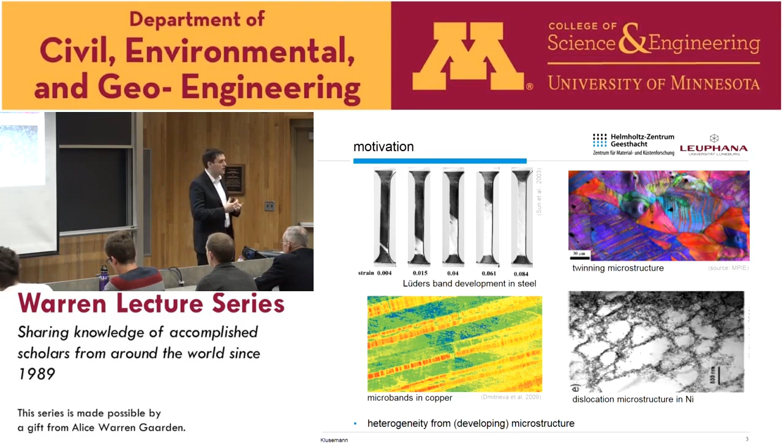And I think this example probably everybody knows: the dislocation microstructure in nickel. Rather than having a homogeneous distribution of dislocations, you see this very typical dislocation cell structure. So these kinds of mechanisms have to be accounted for somehow in your material model to predict the properties correctly.

In my new position, I'm dealing always with applications, so this has to be remembered in the background. Here are some examples of deep drawing, or forming in general, and this has to always be taken into account. It's not enough to just account for a very small part of your material—you want to apply this also to large process simulations in the end. So you need some technical tools for that.

So when we want to understand the material behavior, we always come to multiscale. We just were in the seminar before, also multiscale. This is, of course, a very urgent topic.

You can understand that if you just look here at this cup. You have a specimen at the beginning. You zoom in, and at the first level you find maybe a polycrystal, then a subgrain dislocation structure. You go even further down, you find maybe dislocations, then the single lattice defects, and at the lower scale, of course, your atoms.

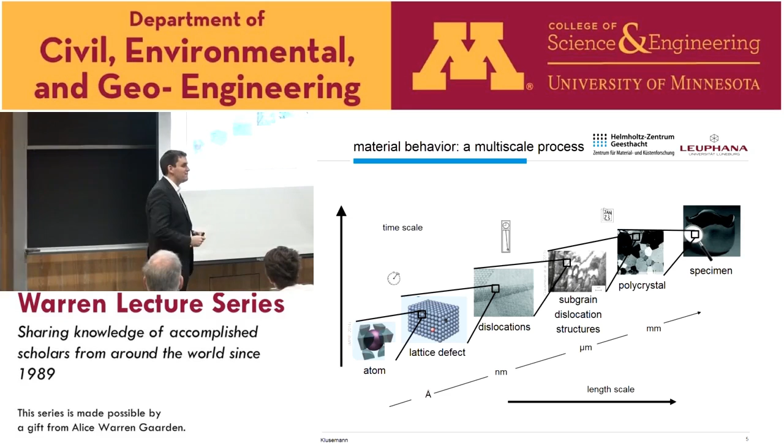So you have several length scales here, but not only length scales, you have, of course, also several time scales. And well, you could, of course, now say, okay, it might be optimal just to start with the atomic level.

You discretize everything with single atoms, and then you have your specimen properties correctly. Yeah, first of all, this is numerically not possible to handle. And additionally, it's also a question if you don't introduce a very, very small error at this level, which actually sums up at the higher scales.

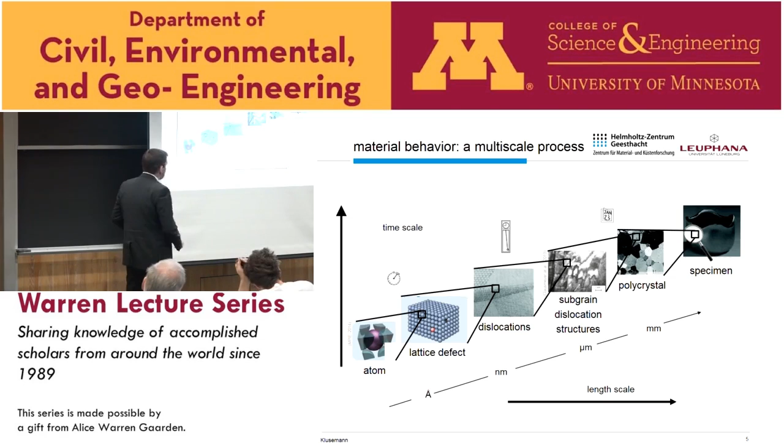So there's always a need for models which first of all couple this information, but also for models which start at higher levels and incorporate, in a kind of homogenized way, the properties from the lower scales. So which you can also validate then with experimental results, for example.

Okay, so the first topic I will talk about is related to size effects. And size effects, when you think about that, you classically think about a Hall-Petch effect. However, this is not what I'm talking about today.

So just imagine the following case. You have the classical miniaturization, which leads to even thinner and smaller metal components. But this doesn't mean that your grain size also has to be decreasing. Of course, if you're talking about nanocrystals, this is true. However, in general, this doesn't have to be the case. It just can be that your specimen size is decreasing. And if you have this case, then of course you have much less crystals present, and this leads to a dramatic change in your mechanical properties.

So what I will talk about is first order size effects. As I mentioned, first order size effects are first of all the microstructure size effect, so classically Hall-Petch, which simply means the smaller my grain size gets, the stronger my material. It's related to the dislocations.

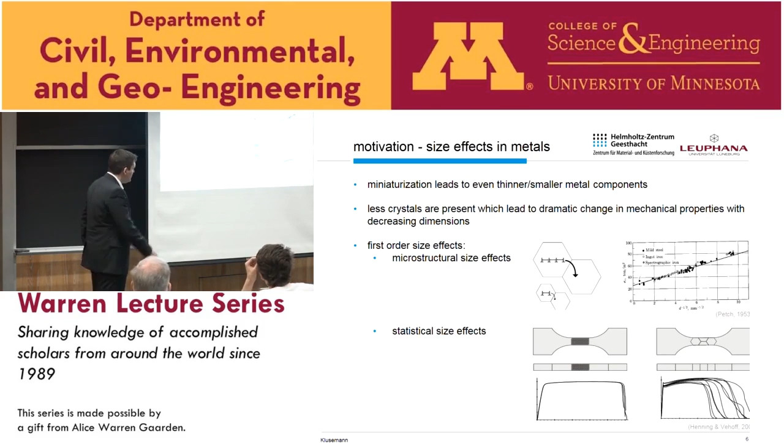What I'm talking about is the so-called statistical size effect, which is often forgotten, and that's just shown here. So you have your tensile specimen, and imagine the case you have a large number of grains here, and you have an isotropic orientation, isotropic texture, let's say. Then it actually doesn't matter what the single orientation of each of the grains is. You have always a kind of similar response if you do tensile tests on these kind of samples.

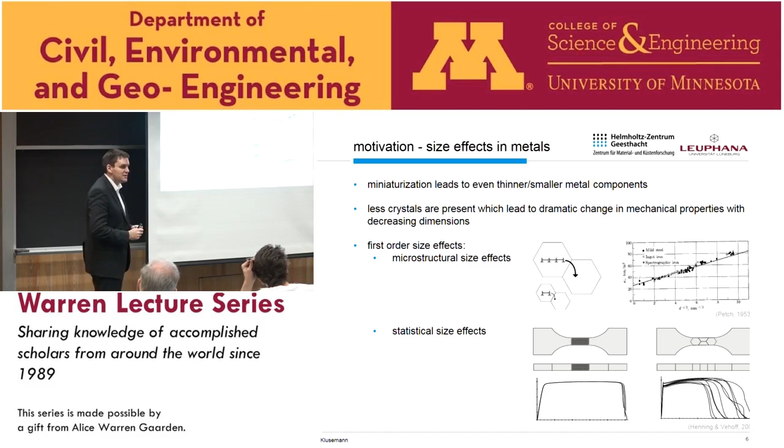However, imagine the case you have, in the extreme, just one grain over the width or even over the thickness. Then of course your macroscopic material response is strongly related to the orientation of each single grain. You have a very high heterogeneity of your answer. Although you would say, well, the material in general has an isotropic texture.

Okay, so what we did here was an investigation of a so-called oligocrystal. So oligocrystal means a sample with very few and large grains. This was an iron-silicon oligocrystal, so it's mainly a model material, I have to say, which allows us to produce these kind of samples. And from experiment we obtained then first of all the grain orientation based on EBSD measurements.

As well as the grain morphology, where we approximated the surfaces, in particular in the thickness direction, to be orthogonal to the surface. So this results in this finite element model, and the real sample looked exactly like this. Now of course the approximation that it's normal to the surface was an approximation, but it fitted quite well to the experimental results.

Then we implemented, of course, a material model for this, which is in principle a classical crystal plasticity model. So what you see here is first of all the plastic velocity gradient, which is simply the sum of all the slips on each of the glide systems. So this is classically the slip direction, and this is the slip normal.

As we're working here with large deformation, we have, of course, the evolution equation for the plastic deformation gradient, simply given by the plastic velocity gradient times Fp itself.

And then we have, of course, evolution equations on our single glide systems. Iron silicon is body-centered cubic, which has a body-centered crystal structure, meaning it has 24 glide systems. These were incorporated then in principle for each of these. We formulated this kind of material law, where we have classically our Schmid stress. This is simply the projection of our global stress, our macroscopic stress, to our glide system level, 24 of them.

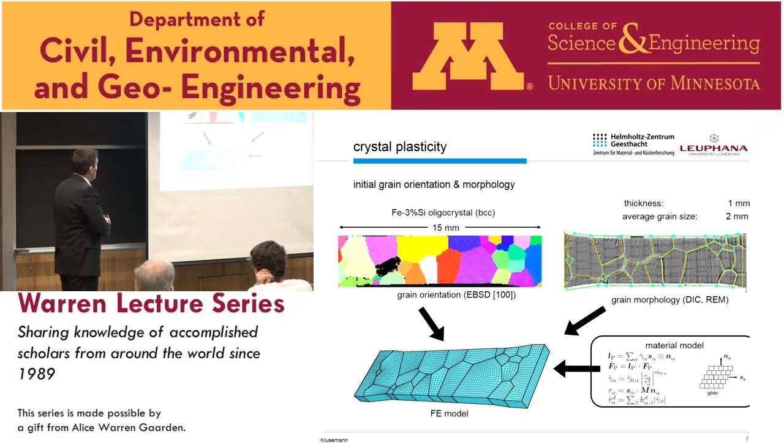So what we did first, we investigated the deformation field. We had the problem that for this iron silicon, we didn't really have enough material data, at least not from the single crystal level. So we thought, let's see first what is the influence of the initial orientation of our grains. So we assumed an ideal crystal plasticity model, with no hardening on the glide system level, just an initial yield strength, while accounting for the orientation of each of our single grains.

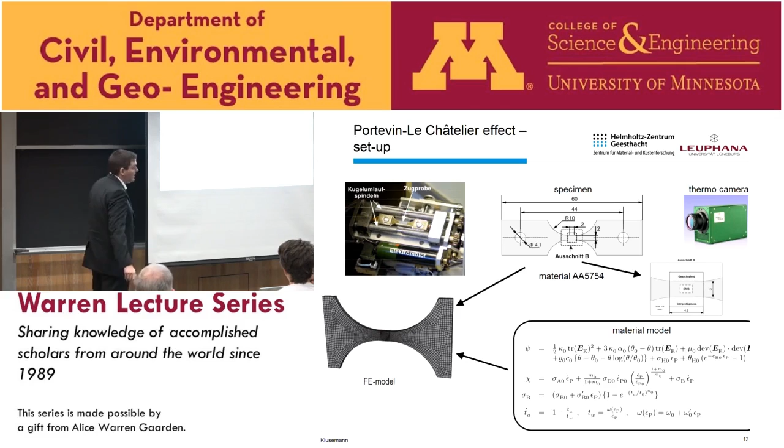So this was incorporated into Abaqus as a user material. First of all, we had to identify some material parameters—that was the first step we had to do. So we identified our simulation based on experimental data for a number of different strain rates.

So first of all, we could show that by identifying the material parameters correctly, we are able to predict the macroscopic behavior correctly, and we are also able to predict this transition between the different modes, different PLC bands, from high to low strain rates correctly. I will show you in a minute that it's actually also true for low to high strains, because there we have an additional change.

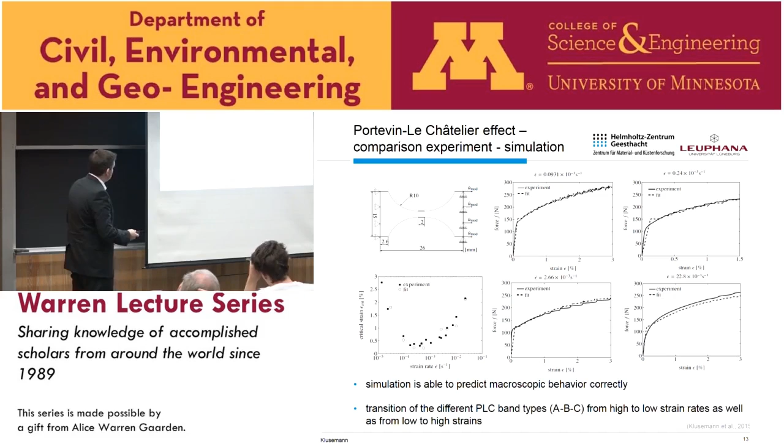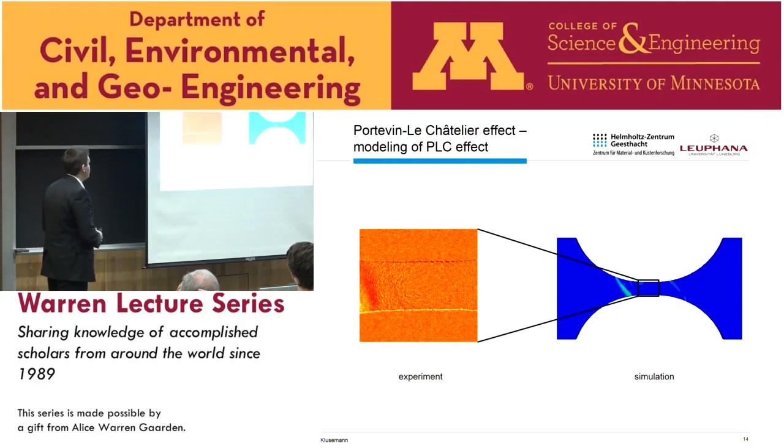So here you simply can see a comparison. On the left you see the results of our thermal camera, with experiments done in Dortmund, and on the right you see the simulation for one specific strain rate. You can nicely see that we have sometimes a PLC band which runs through, but sometimes also disappears. Here we have a continuous band. We see something similar to this—this was a strain rate intermediate between A and B, a kind of mixture, just to show how we obtained results experimentally as well as numerically.

Okay, so first of all we investigated the nucleation behavior—that was the first step. On top here you see some experimental results; the time step between these different pictures is 0.07 seconds. The same holds for the simulation, of course with a different time stage, but the time shift is always the same. What we looked at here in particular was how the PLC band behaves during nucleation with respect to longitudinal and transverse propagation.

What you could see from the experiment very clearly was that during the transverse propagation, we already have a kind of behavior with respect to the longitudinal direction. So the PLC band doesn't fully form until it already starts to move inside the sample, and we saw something similar here. It was a bit stronger, but we also had a starting point, and the middle point was already shifted a bit before it continued to propagate.

We could then investigate the stress-strain level, and the starting point of the nucleation was mainly attributed to a large drop in terms of the stresses. When the PLC band starts, it drops strongly and then starts continuously to increase.

Second, we investigated the band propagation behavior. Here is the experiment shown. In the background you always see the images from the PLC band, taking one slice out of each time step, and we could see a very nice, continuously propagating PLC band in the experiment, which is also nicely attributed.

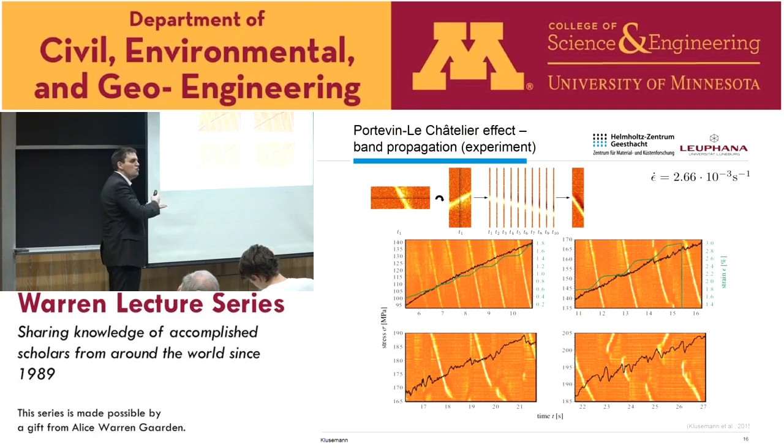As soon as we go to larger time steps, which means the strain is increasing, we see changes in these PLC bands. First very continuous, then later a broken point appears, and later you completely see them starting, stopping, appearing again at the same position, propagating, and the same happens again, with much stronger oscillations - classical type B behavior. This shows that we have this transition from type A to type B, not only with decreasing strain rate, but also with increasing strain.

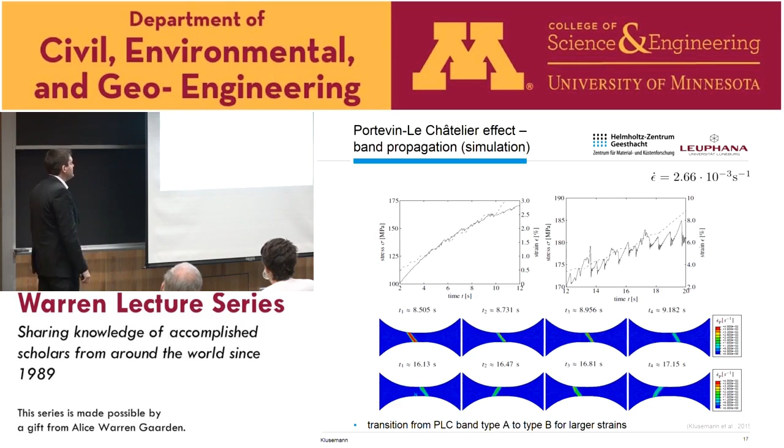We investigated the same with the simulation. On the top layer you see a classical type A band, which starts running through and then continuously propagates. Later on we have a PLC band which starts changing during the run through the gauge region - we even see changed orientation, which we also saw experimentally. So our model was able to predict, at least in tendency, the transition from type A to type B for larger strains correctly.

Then we quantified this a bit in terms of band characteristics. First we investigated the band velocity, and what we saw, particularly in the experiment a bit stronger, was a decreasing velocity with increasing strain for each of the PLC bands. But at the beginning we had a short increase, just until 1% strain, before it always decreases. When we take the average of the first, I think, 10 PLC bands, we saw the tendency that band velocity increases with strain rate, or decreases with decreasing strain rate.

Additionally, we looked at the jumps, because we wanted to investigate how strongly this jump is strain-rate dependent. What we saw was nearly no strain rate dependency - the jump was always the same. But we saw a strong dependency regarding the strain level, which also somehow explains this kind of change in terms of the PLC band behavior.

So this is regarding the PLC band. Now I want to shift to an even higher length scale - into the macroscopic scale and really to process simulation. We were particularly interested in the material behavior of so-called interstitial free steels, DC06, which is very often used in the automobile industry. This material shows interesting effects regarding the hardening behavior.

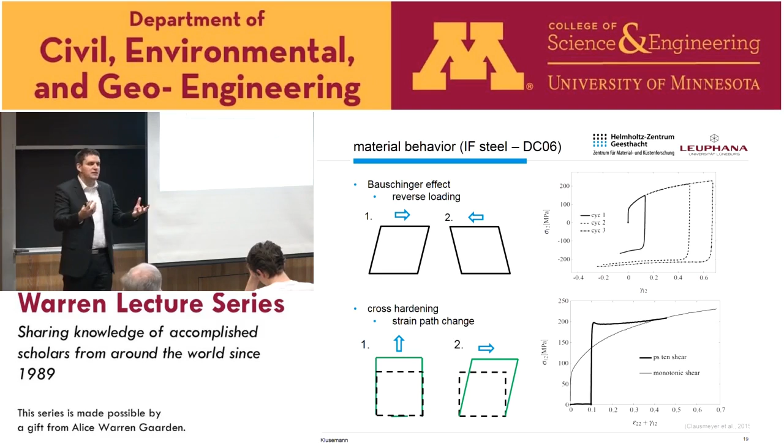What does it mean? You see here a strong stress overshoot. This one is the classical monotonic shear loading response of this material. However, when I first do a plane strain tension loading and then a shear, I have a much higher yield strength. What is the reason for that?

We investigated the microstructure, and what you can see is, this is the loading direction, that you have orthogonal to this very strong and thick dislocation walls. So it's a kind of latent hardening behavior, if you want.

When I now change the loading direction orthogonal to that, these dislocation walls have to be overcome, rearranged, destroyed, however you want to name it. You get a complete reorientation or reorganization of your dislocation microstructure, and then it fits also the monotonic shear stress-strain response.

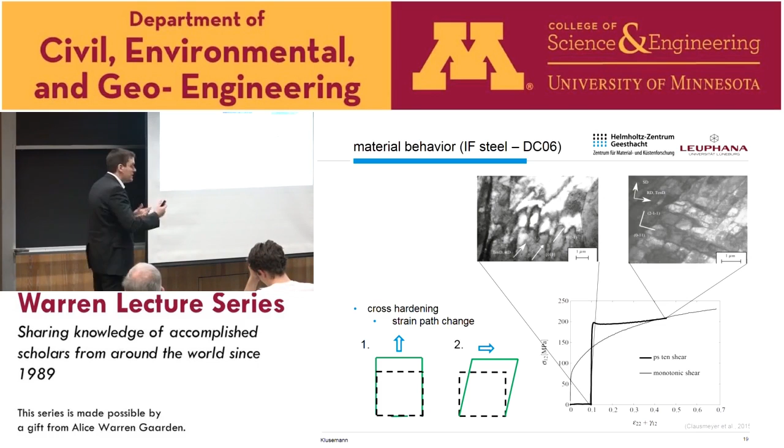We wanted to incorporate this into a process simulation, so we had to take a very phenomenological but micromechanically motivated approach. We formulated a model which includes, first of all, isotropic hardening, so you can imagine your yield surface is just isotropically expanding.

Then you have a kinematic hardening contribution, which means your yield surface is moving - it's not changing, just moving in space. And then you have a cross-hardening contribution, which actually changes the shape of your yield surface.

We formulated this in terms of a flow potential. Here S is simply our macroscopic stress, the Cauchy stress. X is our kinematic stress, with an evolution equation for kinematic hardening coming from the Frederick-Armstrong form. Then we have this fourth-order tensor A, which is our initial material anisotropy.

For example, it could be von Mises if it's isotropic at the beginning, or here we used Hill. Then we have this tensor H, our evolving flow anisotropy tensor - I'll come to that in a second. Additionally, we have our isotropic hardening contribution, very classically, as always done.

Our evolving flow anisotropy tensor has two contributions: one from the dynamic part, and one from the latent part. As we saw already in the experiment, we assumed the dynamic part to be zero because we accounted for that already by the isotropic hardening contribution. So we only had to identify the latent hardening contribution.

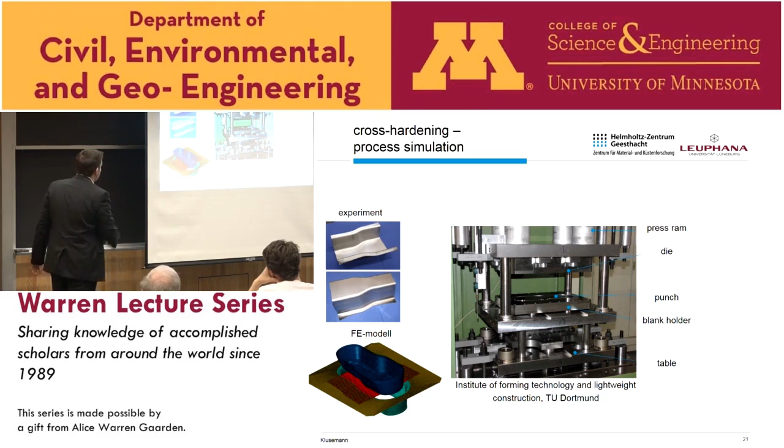We have different curvatures, different radiuses, to have a good comparison for the modeling. So we set up our finite element model, which accounts for the die, for the matrix, and we also applied the correct force to keep the platine correctly in place, accounting for the blank holder force and the correct flow inside our specimen.

Then we performed a simulation, as you can see here. So we have now the complete forming process, and we can measure our stress level and several more features.

What we were particularly interested in, because we couldn't measure it experimentally, was how big the contribution from this cross-hardening actually is. This was one of the aspects we looked at. For this, we simply looked at the norm of this cross-hardening tensor, just to have a kind of measurement of this cross-hardening.

We could see there were some regions which have a stronger contribution than other ones. This could then be used as a first follow-up to take, for example, specimen out of that position and do some tensile tests to actually investigate the hardening behavior which this material had there. But we could already predict that.

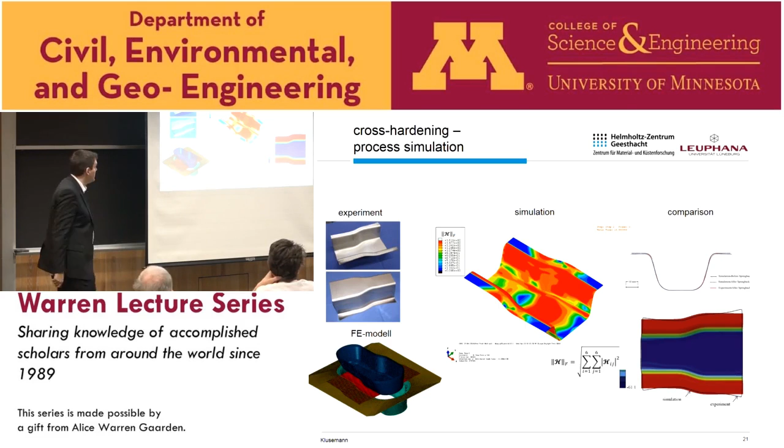We then did some comparison regarding the shape. As you can see on the right, we in particular looked at the effect of spring back in this kind of samples, and at least in the principal shape, we could predict that quite correctly. However, there was some slight deviation at the outside surface, but at least from the cross-section, we got a very good agreement between simulation and experiment.

So we went a step further and wanted to see what might be the effect of this cross-hardening contribution with respect to, for example, forming limit capabilities. For that, we performed some Nakajima tests. In a Nakajima test, you can, in principle, cut out certain radiuses of the specimen, and by that generate different stress states inside of your material.

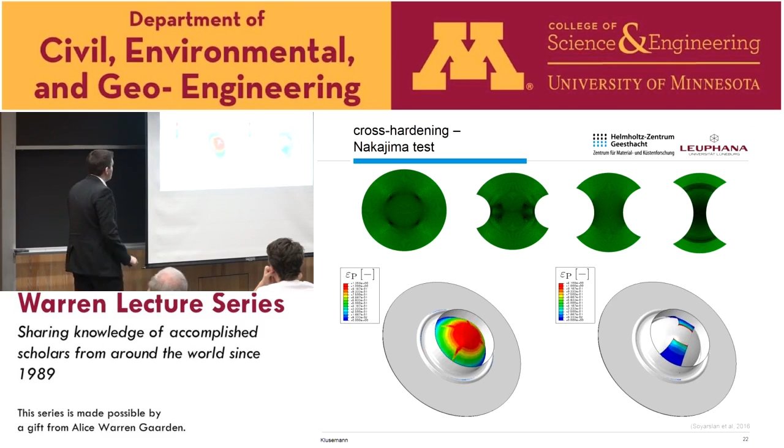So you have a very nice choice to actually investigate these different strain states, starting from uniaxial stress state, coming here to a kind of biaxial stress state. What you can see from the simulation is, first of all, in the uniaxial state you have a much earlier failure behavior, which is also classically known, compared to this biaxial case.

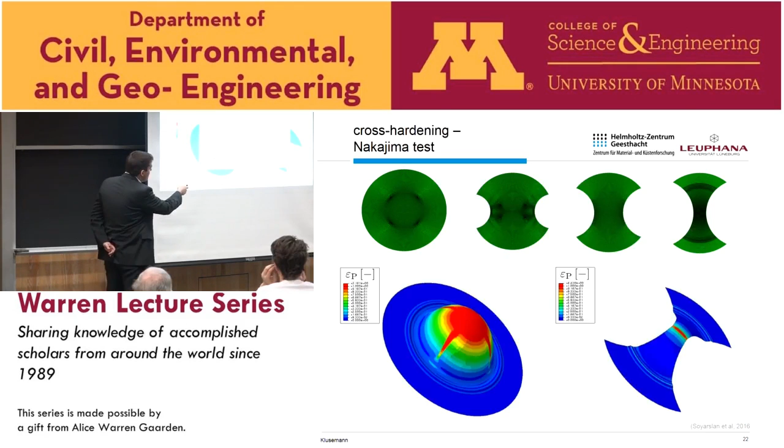Interestingly, there's a difference between the cross-hardening and the non-cross-hardening model. In the uniaxial case, there's no difference, and you would not expect any difference either, which I will show in a minute why. But you would expect strong differences in this other case, and this is also visible in the simulation. The cross-hardening seemed to actually increase the forming limit capabilities of the material, at least from a simulation standpoint.

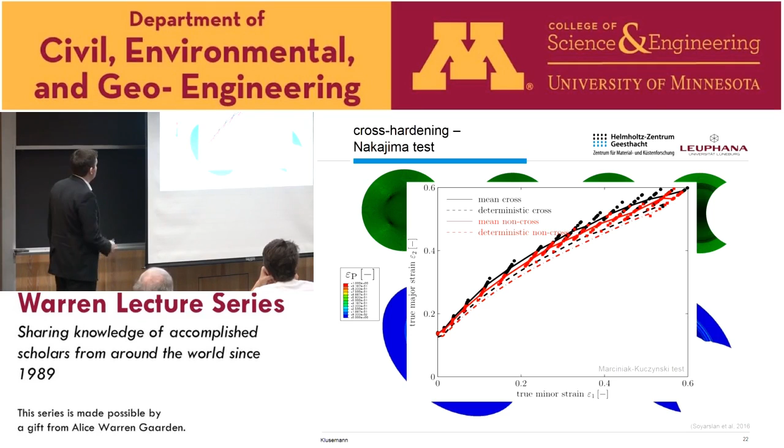Now you can go a step further and investigate the forming limit diagram, which is classically done for the production engineers. Here we used not the Nakajima but the Marciniak-Kuczynski test, and by that we could obtain a similar trend. We did some deterministic and some statistical analysis, but we always saw that the cross-hardening shows a higher limit, of course increasing with increasing the ratio.

This has to be clearly said. And what is actually the reason why we have no difference here and a strong difference there? We attribute this mainly to the yield surface changes. When you imagine a classical isotropic hardening, you simply have an increase of your yield surface. When you have a kinematic hardening, you just have a shift of your yield surface, which means your curvature is not changing at all.

And when you have isotropic plus cross hardening, you get a kind of flattening of your yield surface, and from a mechanical standpoint, when you have a more flat yield surface, this means you have an increased formability condition. So the extreme would be the vertex, that would be the extreme case.

So to my last point, this is in principle what we're currently doing. As I said, I'm working now also at the Helmholtz-Zentrum in Geesthacht, and our main focus is the design and development of lightweight integral structures with improved damage tolerance. Here you can see some of our facilities in our department, and we in particular are working on laser joining and laser modification techniques. We always view this from a process, properties, performance triangle, and we want to optimize in this regard.

But we not only want to do that at lab scale, we actually want to do it at large scales, so we really do conception and realization of lightweight demonstrators for the aerospace industry. They are then directly 1 meter long, so we are not anymore at these small scales, and these machines have to work also at these large scales. One of the things we're particularly interested in is the damage tolerance behavior, so we test them, do assessment, and of course also simulation, and that's where I come into play.

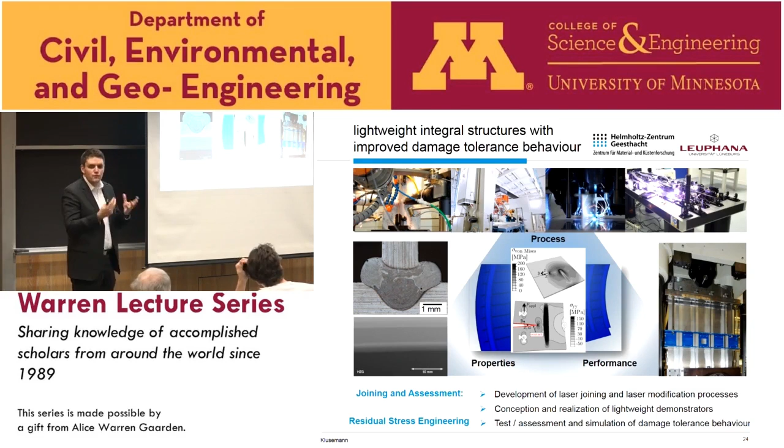My group is called Residual Stress Engineering. We're trying to design the residual stress profiles inside these structures in an optimal way to have improved damage tolerance. One example would be the laser beam welding technique. Why is laser beam welding interesting at all? It's an alternative to rivet connections, which allows lower weight. Here you have a rivet connection, here you have a laser beam welding connection - you directly see there's less material present. Here you see a laser beam welding process in our lab. We have two samples, a butt joint, and we run our laser over that. Here's our laser beam, we have melting of our material, then the material solidifies, and we have a connection between the two parts.

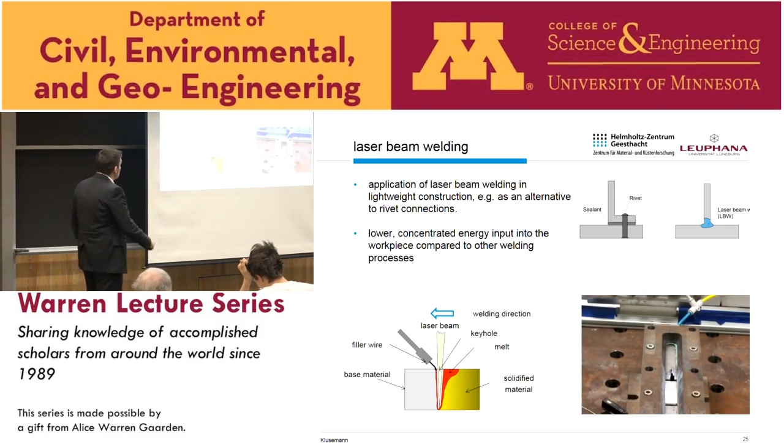Why is laser beam welding in general a nice technique? It allows a lower and concentrated energy input into the workpiece compared to other welding processes. So you can do it very concentrated.

What we did is set up a process simulation model. One of my PhD students is currently working on that, which has to account for a number of different phenomena. In particular, we looked at the precipitation hardening model. It was an aluminum alloy 2139, and we incorporated all this information into a plasticity model.

The first step, as you can imagine, laser beam welding is quite fast and we have extremely high temperature gradients. One of the things we wanted to incorporate was a temperature model. We used a very classical temperature distribution to model the laser heat input, and we obtained an analytical formulation based on Green's functions. I'll avoid the equations here - we could predict the temperature field directly for the simulation in a very fast way. It costs in principle nothing, we can directly incorporate this into our finite element simulation.

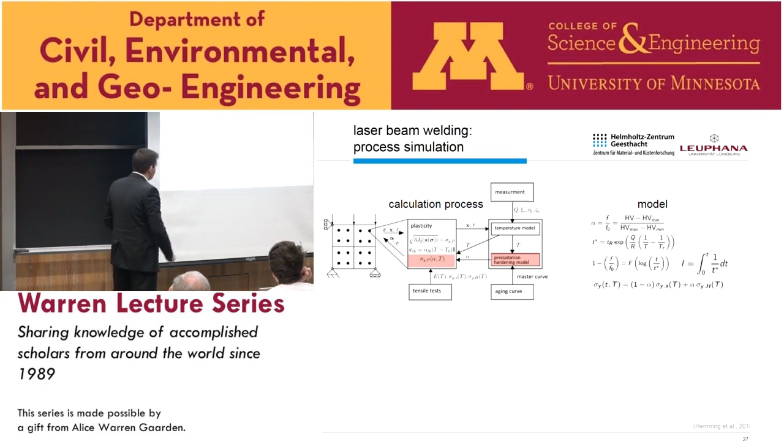Then we went to the mechanical part. For that, we investigated some aging curves. This is now for 6005 out of the literature, based on Vickers data, and we did that also for 2139. By that you can get a so-called master curve, which gives a relation with respect to the volume fraction of your precipitates inside your material in terms of temperature and time. We used a model out of the literature, very similar to the Robson model. This is coming from Myhr, from Norway, and this can be incorporated in a mixture rule, which accounts for material in the complete solute state and in the complete tempered state.

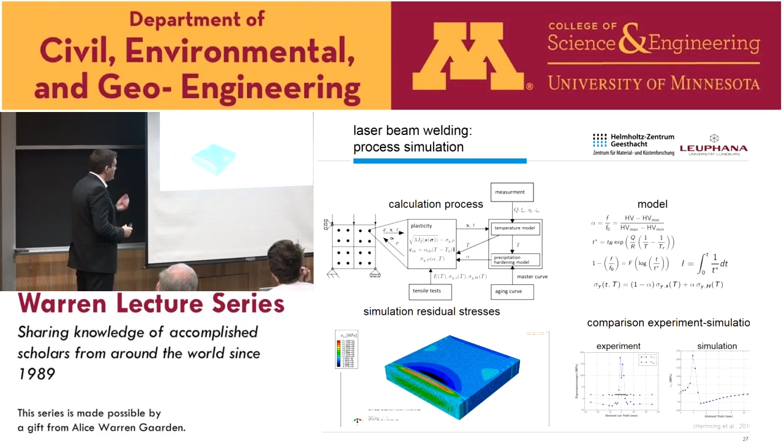We investigated this experimentally at synchrotron, at DESY, with synchrotron radiation. This was shown here, and we could predict the same in the simulation. In the simulation, only half is shown because of the symmetry. This gives a first idea - we are still developing this model further to incorporate this effect on a more detailed microstructure level.

The last topic I will present is the so-called laser shock peening process. The goal here is to have improved damage tolerance and design for lightweight structures.

So why do we do that? Well, fatigue is one of the main causes of failure mechanism. And when we have a residual stress field, compressive residual stresses, this increases the fatigue resistance. So we need a specific residual stress design.

So here on the bottom, you can see our process in the simulation, hopefully. What you can see here in a second is that the laser, which is moved by a robot, is shooting in principle laser impulse on the side of our specimen, and by that we can introduce a kind of shock wave.

The process is looking like this. So we have here usually a water layer or a foil. We have our laser pulse, and then this laser pulse penetrates our material. By this, it builds up a plasma, so we have some vaporization of our material. We have here the water layer, which keeps the plasma under this. And then by this, we're introducing a shock wave or pressure wave inside of our material.

And what we in particular were looking at is what is actually the influence, for example, of the base layer and of course of the process conditions in this process.

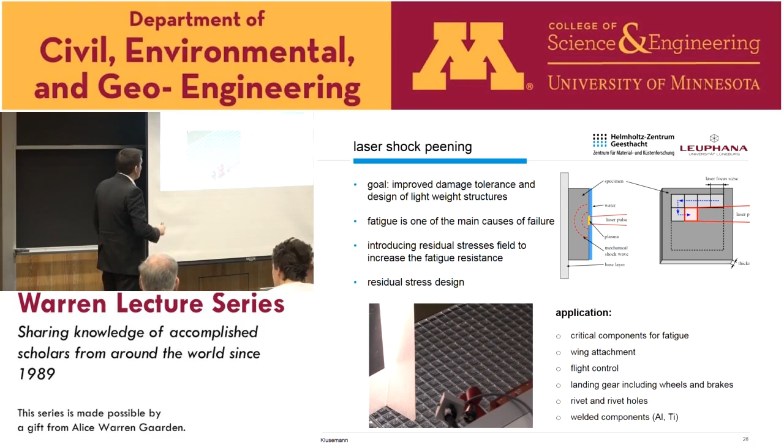So, how much time do I have? Two minutes. Perfect, yeah, I will do that.

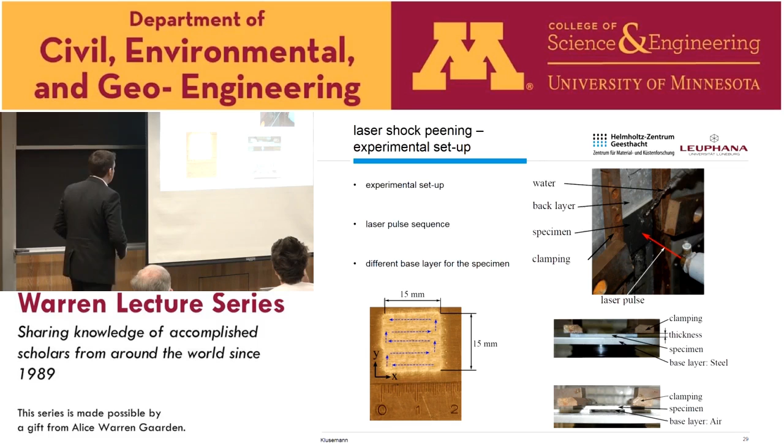So what we did, first of all, we investigated this experimentally. So here you can see a typical specimen, how it looks like in the experiment. And we investigated this in particular with two base layers, one is steel and one is air, to investigate how big is the influence of that. So this is how our specimen look like.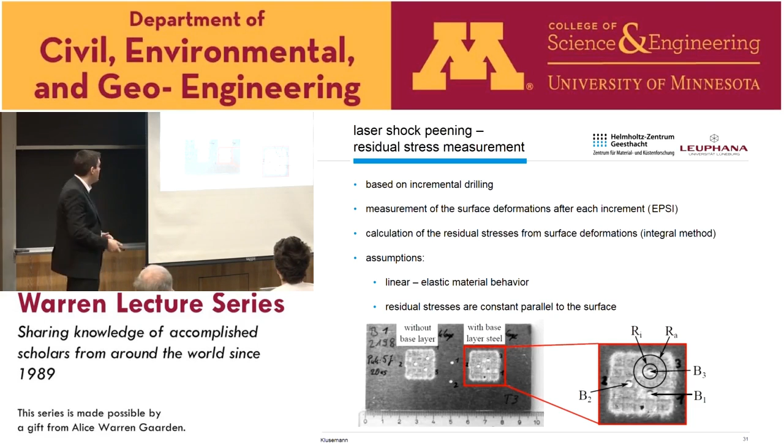Hole drilling is, we measure for that the surface deformation after each increment which we drill. And we can then, based on the integral method, calculate the residual stresses from deformation. I have clearly to say the assumption here is linear elastic material behavior and that residual stresses are constant parallel to the surface. This has to be clearly mentioned.

So we studied then the influence of the base layer. We did the experiments. We obtained here, of course, our residual stress profile over the depth. And you see you have an increase in depth, and then it goes back to 0 at some point. Laser shock peening is a process which introduces relatively deep compressive stresses.

We set up a finite element model for that, investigated then the influence of the base layer. And what we could show is, well, there was no influence. We could take it, so everything what we did experimentally was fine. Here also some experimental data: so if we stack steel or air, it gives us the same response. So this was now a stage, no influence of base layer.

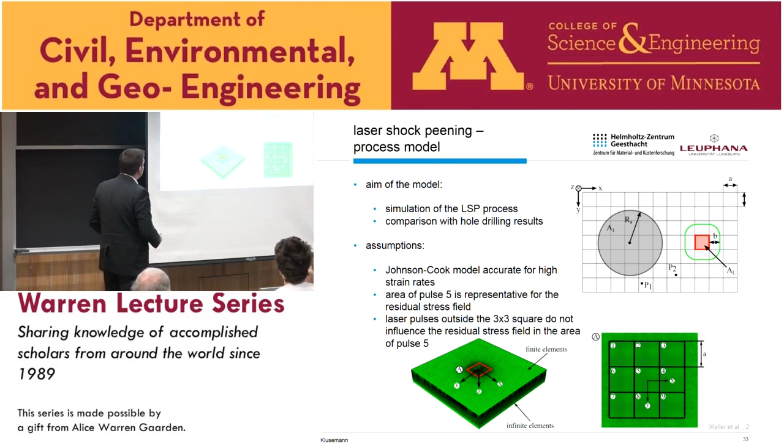I will skip over this. So we have, of course, taken a Johnson-Cook model in our simulation, and we had to develop a method how to actually calculate now our stresses in simulation to be comparable to hole drilling. So we had to take some average over a surface. We developed this here.

And of course, one important question here was how to import the pressure field inside of our simulation. So we used this pressure pulse, and we could identify this on experimental data to have the accurate response of that. We did that for 2198T3, and this should be the last slide on that.

So we have the experiment, we set up our new model now. We incorporated here infinite elements because we know there is no influence of the base layer, so we can account for that. We have our 9-shot model. This is enough for the simulation at this point.

Then we could incorporate how is the influence of each of these shocks inside of a material. So this is how the residual stress profile looks afterwards. We did then an identification for 2198 T3. So we have hole drilling experiments and our simulation, which fits very well.

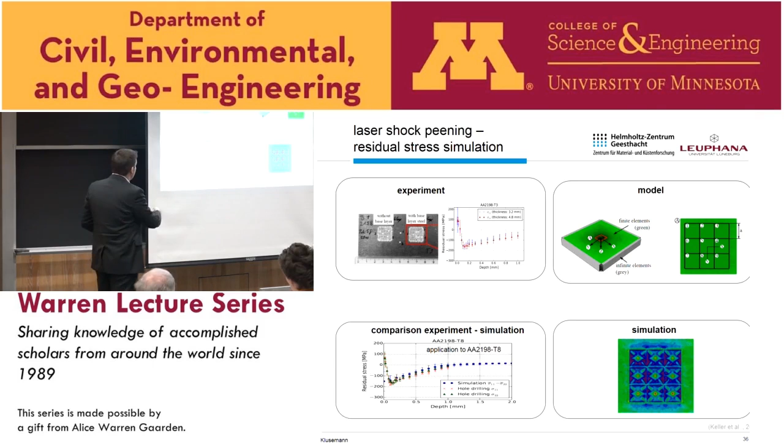But we wanted to see, okay, is it also predictable. And we did that for a different material, in this case 2198 T8, which shows completely different material properties in terms of strength. And yes, we were able to predict the response quite accurately, so there is a faster saturation in terms of the residual stresses of these specimens.

And with that, I'm actually at the end. I presented you some hopefully interesting work, and I'm thanking you for your attention and open for questions.

I'm still impressed by the very first one you showed in terms of how well that fit. I'm a believer that computer experiments are most important in showing us what doesn't work rather than what works, but always when you give us a seminar, you show what works. I'm curious, because that model wasn't obvious to me. What did you try before that failed?

Actually, in this case, we didn't try anything before, because what we used is a very classical crystal plasticity model, known since the 90s. Very classically, we were actually impressed that we could capture this already with this simple model. We were expecting we would need something much more sophisticated to accurately predict this kind of deformation history, but we don't need any GND kinematic hardening.